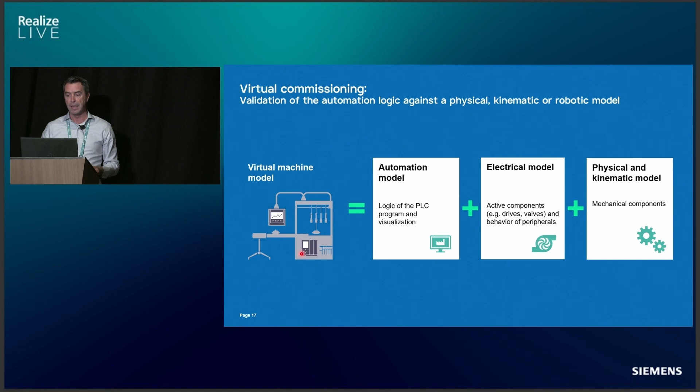So that's kind of just a visualization of what we have from our real or virtual PLCs on the automation model. Electrical, here you see the drives, and drives are that 800-pound gorilla in the corner, because the whole goal with simulation or virtual commissioning is whatever you develop on your PLC code or your drive logic to control the automation, the moment that starts to deviate from what you did virtually 6 months or whatever before that machine is built, the less the controls engineers will actually trust that when they actually use it.

So you need to be able to consider both the automation aspect of it and the electrical behavior, and drives and safety and all RFID cameras and all these different things have to be able to simulate it for the full system to be able to work well. And then in this scenario here, we're going to get into robotic simulation.

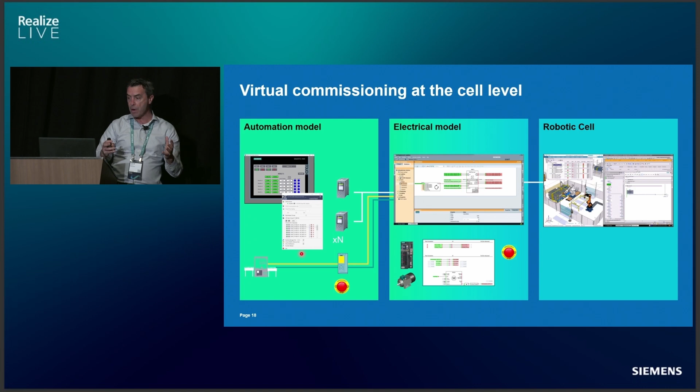So very quick before I pass it over to Teng, where he's really going to get into some insights for key use cases they found, here we have our Tecnomatix Process Simulate on the left-hand side. This is robotic battery assembly. And on the right-hand side, we have our virtual HMI, where you see our graph editor, where we can step through the code on the virtual HMI and really see where is the sequence of the machine.

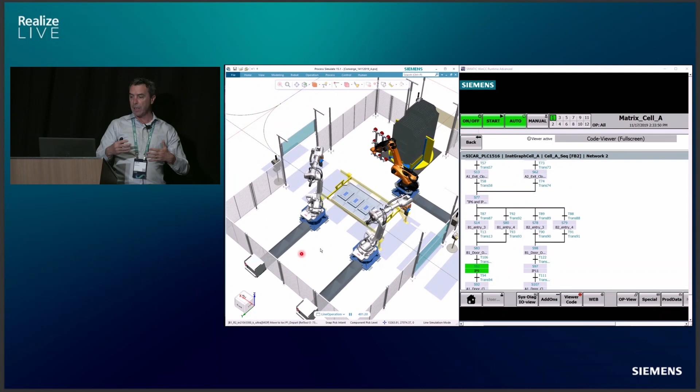And here you see PLC logic driving the simulation with multiple robots, an ABB robot, a KUKA robot, or a FANUC robot, all working well together. And I can debug that logic and prove out that entire cell. And that's what I'm going to pass over now to Teng to get into. I don't want to lose sight of time, because we've got some good things we want to show you here today, these specific use cases.

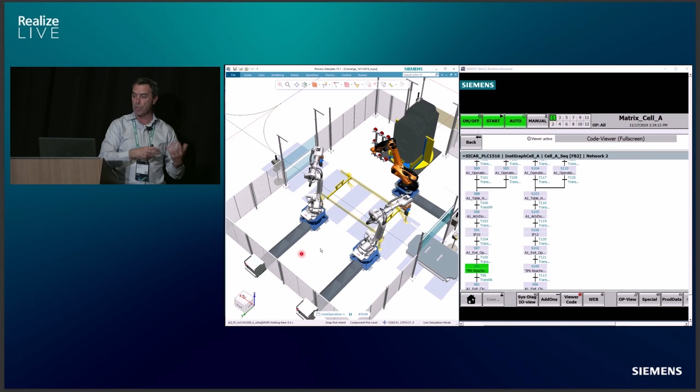But the robot vendor is controlling the robot arm, but that robot does not live in isolation. Everything around that is going to be controlled by a PLC, or the safety, the guarding, the motion, and that's where we can actually really help simulate. Here you see an example, we're going to poke the I/O signals for the safety, PLC code on the right side, modeling software on the left. So with that, Teng is going to take it over and go a couple of levels deeper on what they've seen in working with customers doing this.